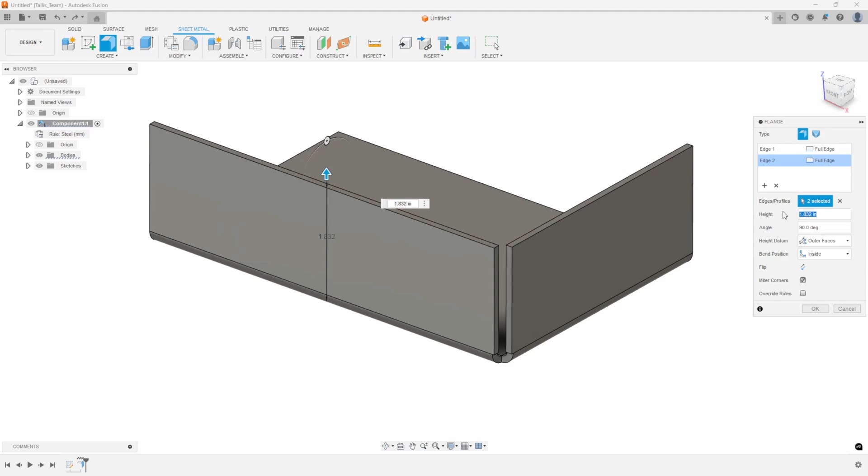I often get the question on how do I create my miter gaps to be closer together inside of Fusion sheet metal. Well, let me show you how you can do this. One of the questions I see quite often is when people are in Fusion sheet metal and they create a flange, there's quite a large gap in the corner and they want to know how to make this gap tighter or narrower. A lot of people say just grab the faces and pull them closer together, but that's not the preferred way. In this video, I'm going to show you how you can close this gap.

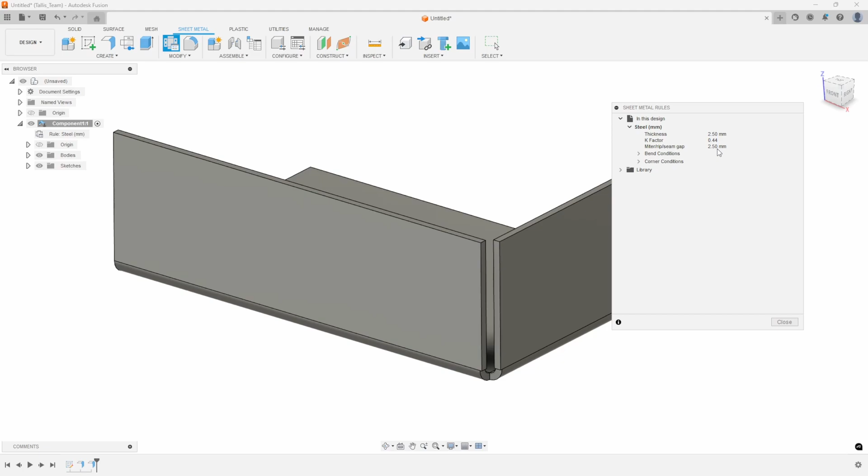The way to do that is to actually modify one of the settings in the sheet metal rules. In this example, I'm using the steel millimeter sheet metal rule. If I go into sheet metal rules in this design, you can see we're using steel millimeter, and the thickness is 2.5 millimeters. Right here you see miter / rip / seam gap, and it is also 2.5 millimeters. This is actually the setting that is specifying what the miter, rip, and seam gap is.

If I hover over this, you can see we can edit the rule or create a new rule. I'm going to go ahead and edit this rule, and you can see the thickness is 2.5, and the miter, rip, and seam gap is set to thickness. Let me move that up so we can see what's going on here. Basically, whatever the thickness of the material is, that's what the gap is going to be for our miters, rips, and seams.

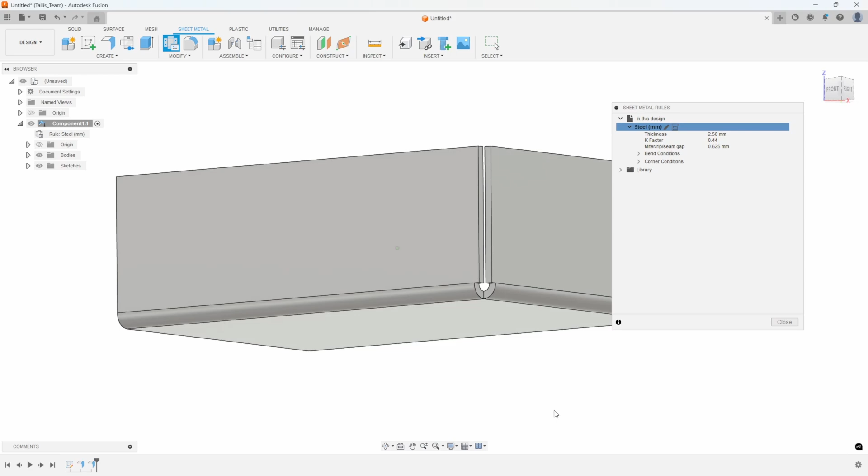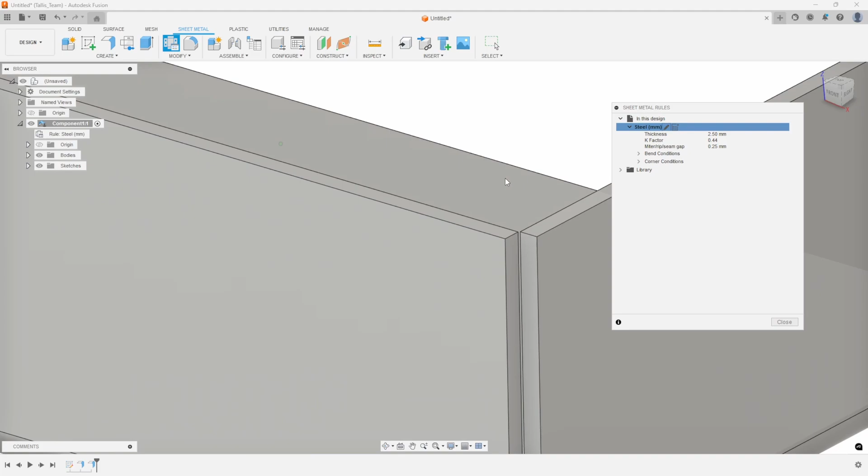So if we were to make this smaller, then our gap would be smaller. I'm going to leave it as thickness, but say divided by 4. I'll hit save, and you can see how instantly that updated, and we now have a much closer gap. The reason for that is because we changed the rule. Let me edit this again - we basically said take whatever the thickness is and divide it by 4. In fact, I could even make that smaller by saying divide it by 10. I'll save that, and we can see that got even closer.

I'll edit this one more time. And if you don't want to use a variable like thickness, you could even come in here and say something like, well, I want that to be 0.05 millimeters, for example. I'll save that, and we can see we made it even tighter and even closer.

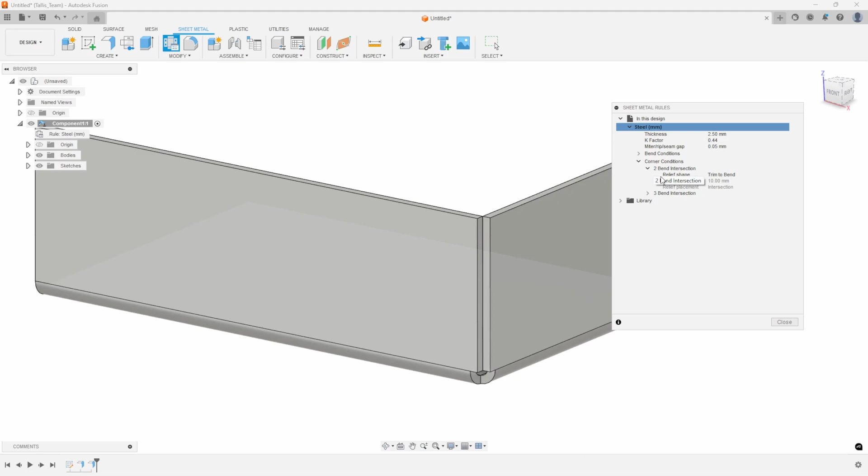Now you'll notice there's like a hole down here in the corner, and that is because of the corner conditions. This is a 2-bend intersection, so I'm going to expand that open, and we can see that's a trim to bend relief. If I edit this rule and come into my corner conditions, I'll move this off to the side. I'm going to change this miter, rip, seam gap - let's set that back to thickness divided by 4. Then I'm going to edit this 2-bend intersection, and you can see, sure enough, it's set to trim to bend.

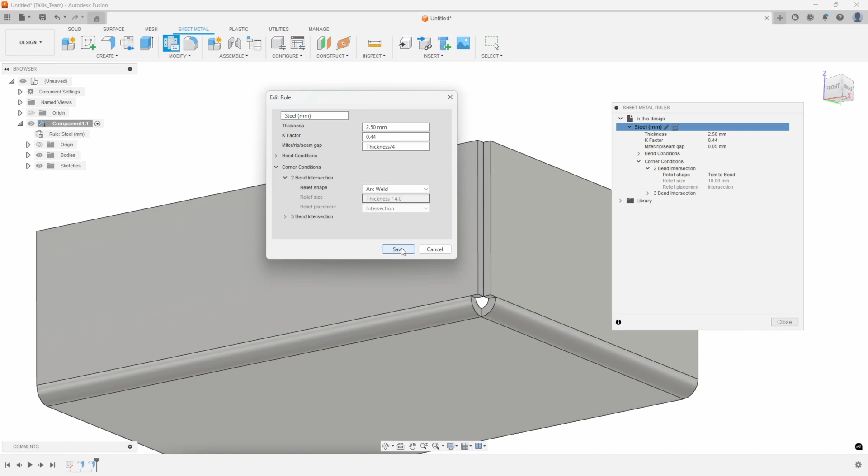Now, I personally like to use what's called arc weld, and I'll show you what that looks like. So I'm going to say arc weld, I'll hit save, and you can see what that looks like. Instead of a hole kind of in the corner there, it's basically just bending that up, and this is like an arc weld bend relief.

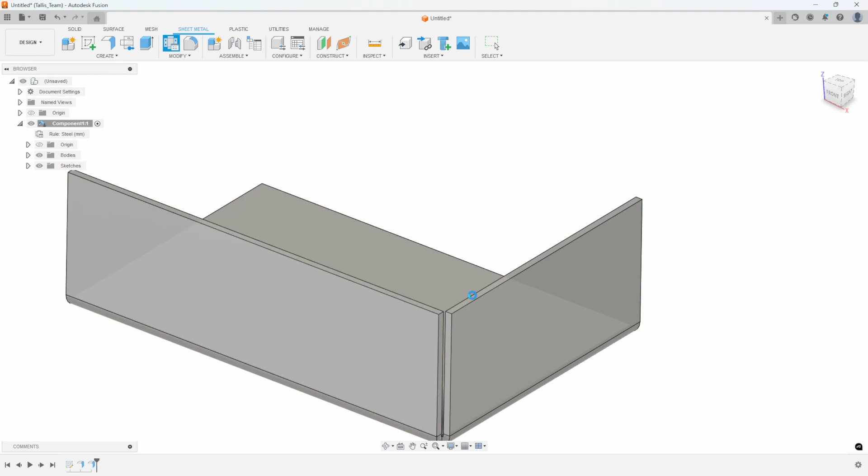Now if I were to go ahead and do a miter on the top here, I'll select these two edges and do a flange. We can see because the miter corner is turned on, it's going to go ahead and do the miter for us. Let's just do a 1-inch miter in this case, and I'll say OK.

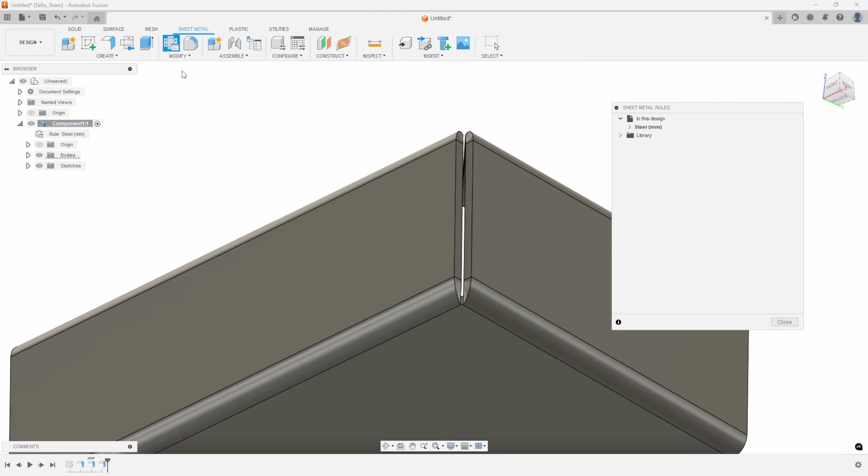We get a nice close looking miter that goes all the way along this edge. So once again, that was by editing the sheet metal rule and changing this miter, rip, and seam gap. And then the other recommended change is to change the two bend intersection. Now I changed it to arc weld.

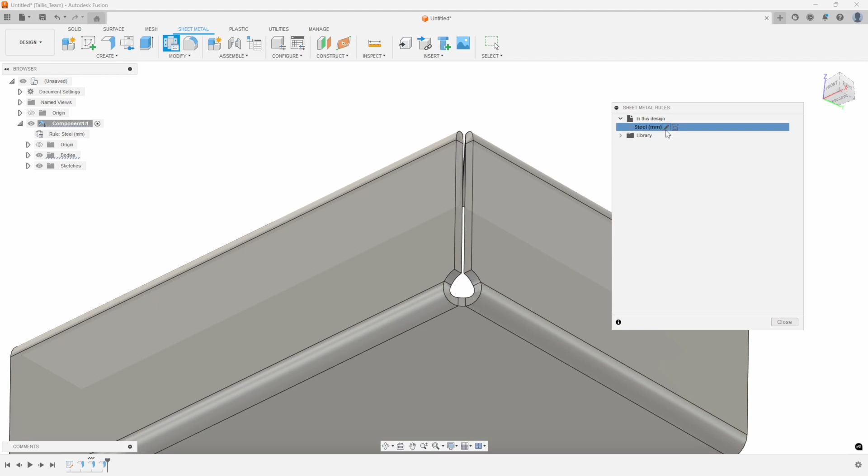You can try all these other ones. So for example, if I say round, you'll get that result. I'll just go through all of these so you can see what they look like. This is the corner condition setting. So that was round, and square will look like that.

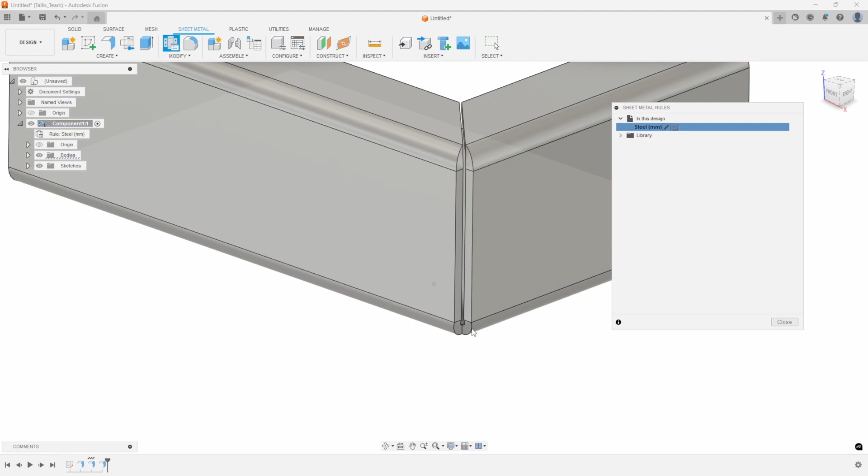Obviously those don't work as well if you're wanting to do a nice weld, for example. Tear is one of the other ones that I'll use quite often. You can see what that one looks like. It makes a little bit of an opening right there compared to the arc weld that I tend to use. So that one's tear. Trim to bend we've already seen.

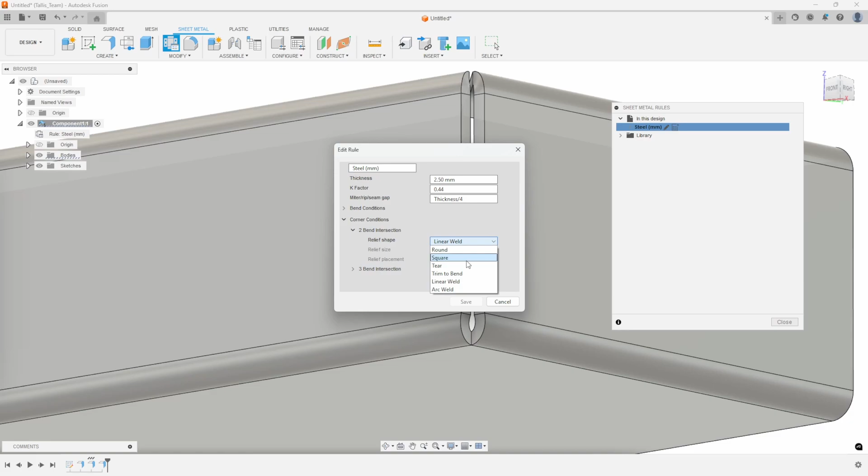Linear weld looks similar to that one. And then let's do arc weld, which is the one that I tend to use all the time, which is that one there, which basically keeps even thickness all the way through.

So one of the tips that I recommend when you start to create some sheet metal components is I'll come into my sheet metal rules, expand open my library, and by default there's usually about six of these rules: steel millimeter, stainless steel millimeter, and aluminum millimeter, and then the same thing here with steel inch, stainless steel inch, and aluminum inch. And then the rest of these are basically ones that I've created.

So I'll just pick one of these, for example steel inch, and come in here and say new rule. I'll click on this, and then fill in the information that I want. I'll leave it as steel inch, and then give this a particular name, I'll just call this one demo for now. I'll give it the thickness that I want it to be, so let's just say 0.125 in this case.

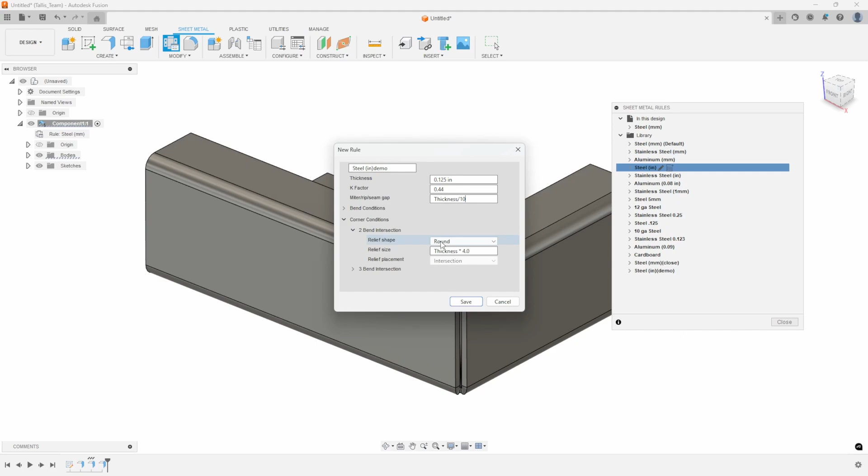And then I'll change this miter, rip, and seam gap. I'll leave it as thickness, but I want this to be pretty tight, so I'm going to say divided by 10 in this case. And then I'm going to come in and set my two-bend intersection to be an arc weld. I'll say save, and I now have this new sheet metal material called steel inch demo.

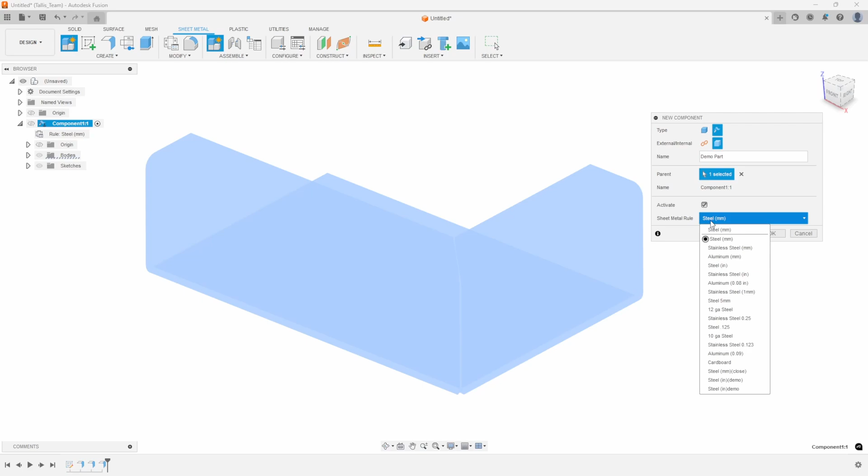And so if I were to create a new sheet metal component, you can see that here, I'll call this demo part or something like that. I can select the rule, so here's that steel inch demo that I just created. I'll say OK, and I'll turn this guy on.

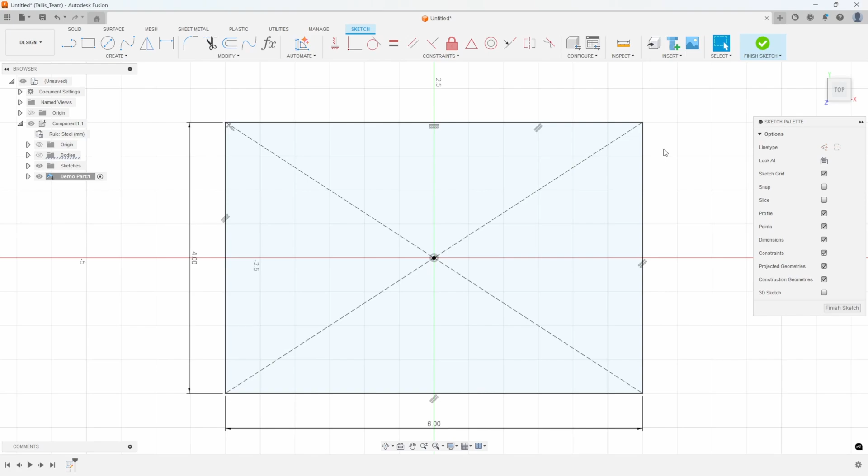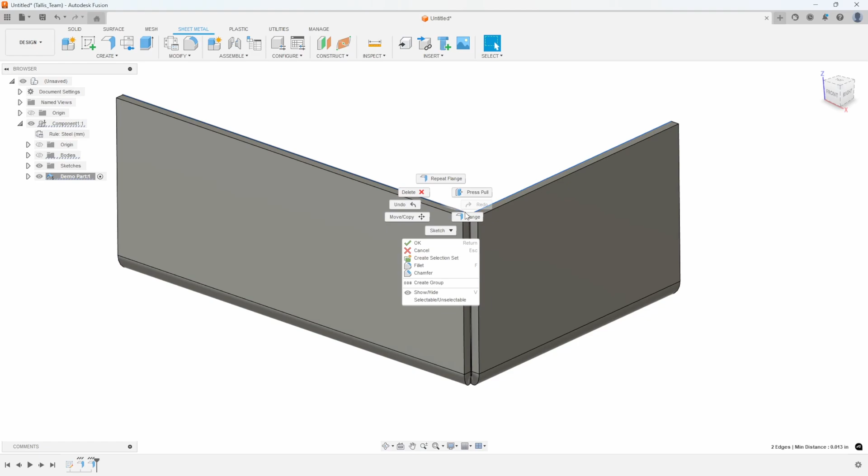Let me turn this guy off. Create my part real quick, so let's just make this 6 by 4. I'll create my flange, and then if I were to create flanges on this corner here, you'll notice very tight edges, and it's doing that arc weld in the corner. Let's just make that 2.5, and if I were to add my flanges here, we'll have a nice tight miter for the flanges there also.